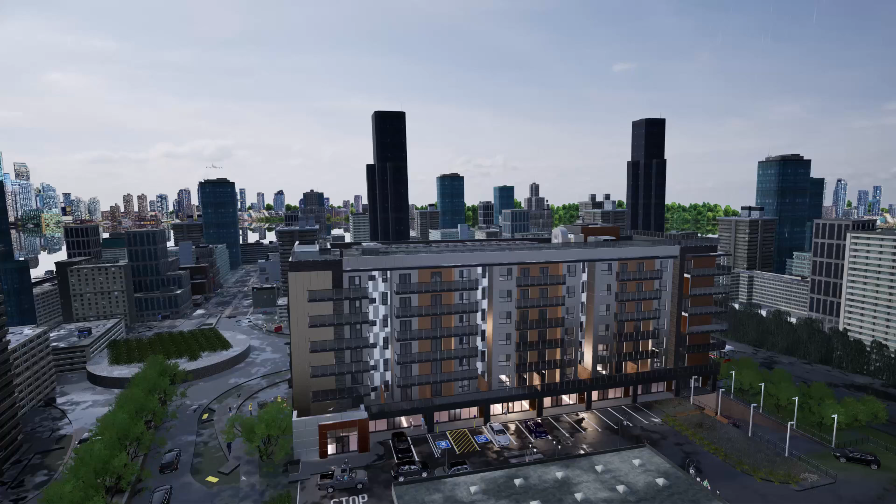Our proposed project is Ecolink, the mixed-use development. We are Triform Techno Design and our guiding motto is creating future-ready, eco-smart designs. Our team includes Birinder Singh Gariwal, Danish Madan, and Zishan Ahmed. Each of us brings unique strengths from visualization and design development to technical documentation and code research. Working together allowed us to combine these skills into a cohesive final project.

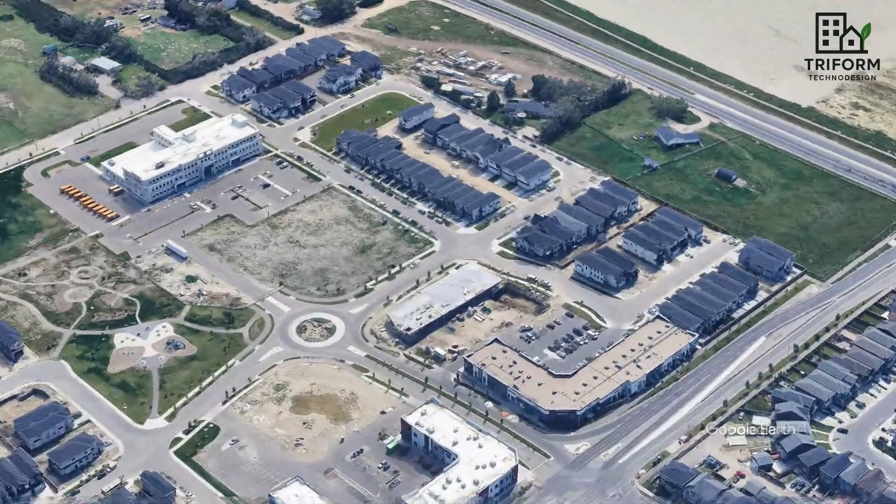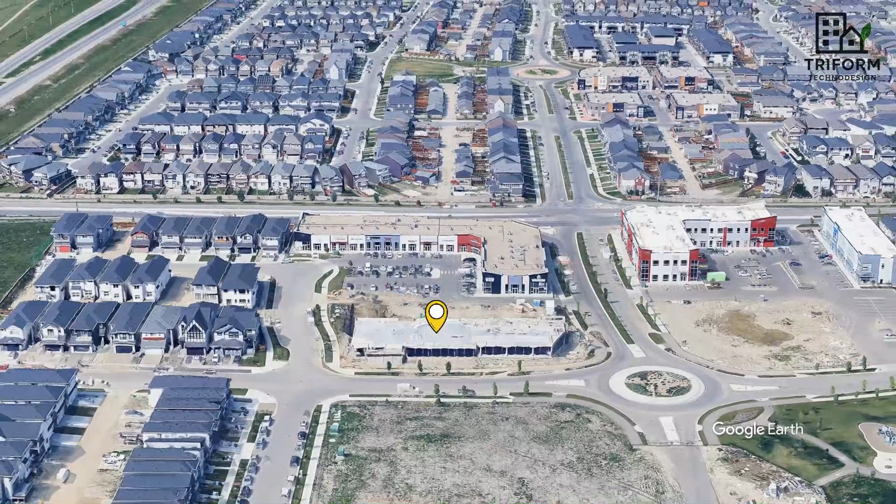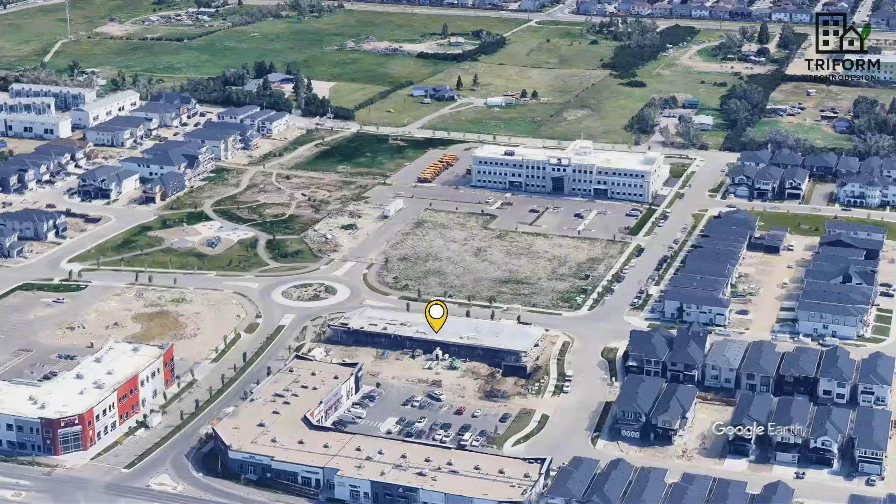The project is located near Metis Trail and 88th Avenue Northeast, at the junction of Guru Nanak Gate and 87th Avenue Northeast, in the growing community of Saddle Ridge in Calgary. This community offers strong potential for mixed-use development as we don't have a lot of opportunities in this community for commercial activities, making it an ideal site for our proposal.

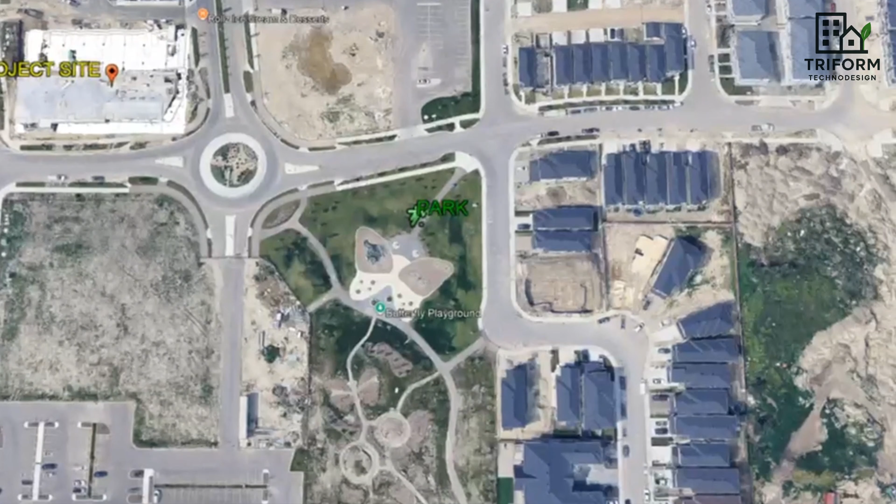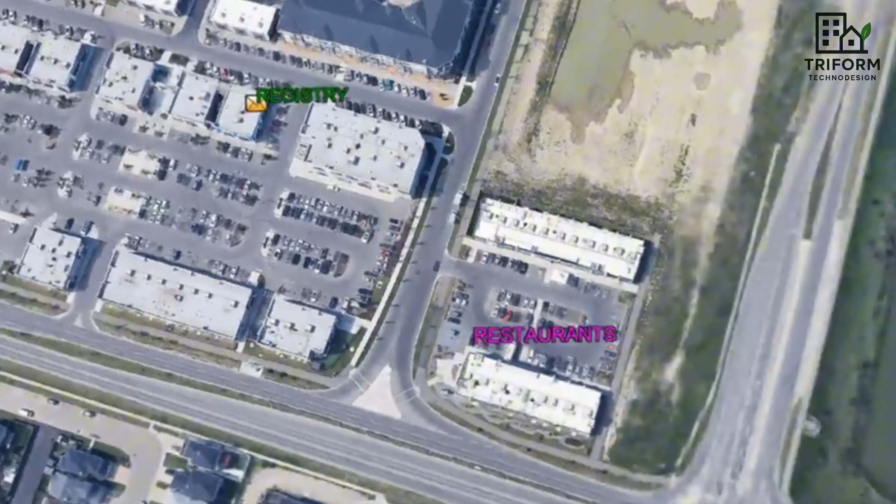Our proposed project has a lot of amenities like a park, and 100 meters away we have bus stops, and we have elementary schools at walking distance, and we have registry, restaurants and a train station within a 1.5 kilometer boundary.

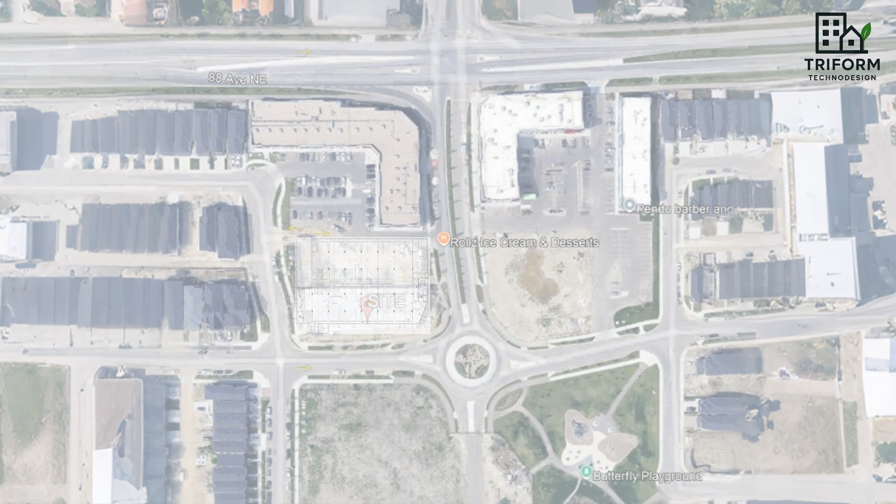Visuals showing the comprehensive external traffic circulation plan that ensures smooth and efficient flow of traffic around the site with well-defined entry and exit points for vehicles. Our design reduces vehicular delays, minimizes congestion, improves accessibility, and enhances pedestrian safety.

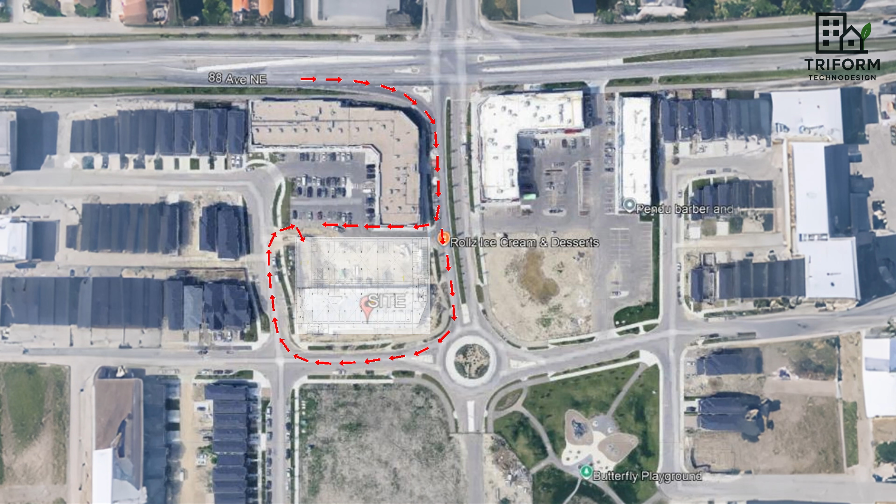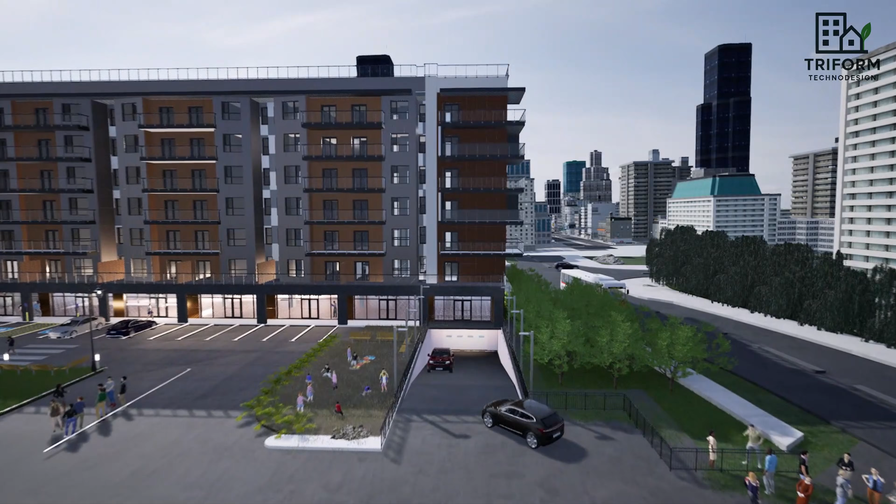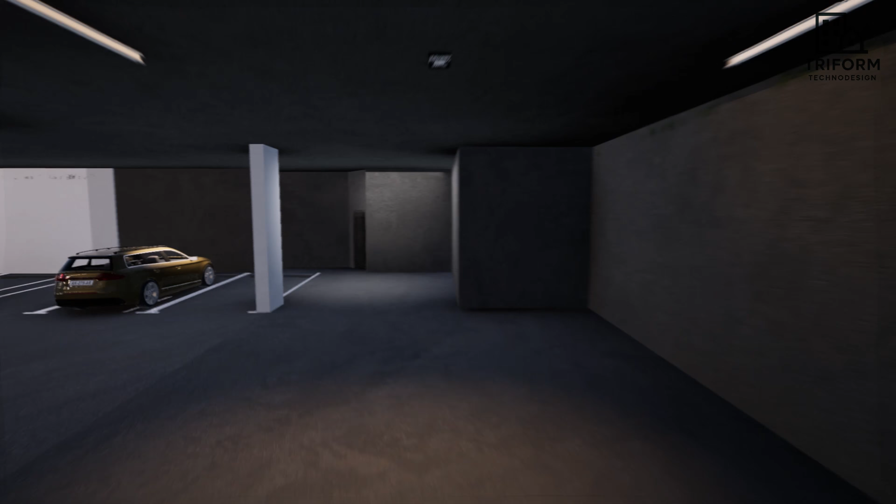Our underground parkade has been designed with safety, clarity, efficiency, and better vehicular flow of traffic in the basement in mind. The circulation layout ensures smooth two-way traffic flow with optimized aisle widths, easy maneuvering, and clearly defined entry and exit routes that provide safe access, while well-organized parking stalls maximize efficiency.

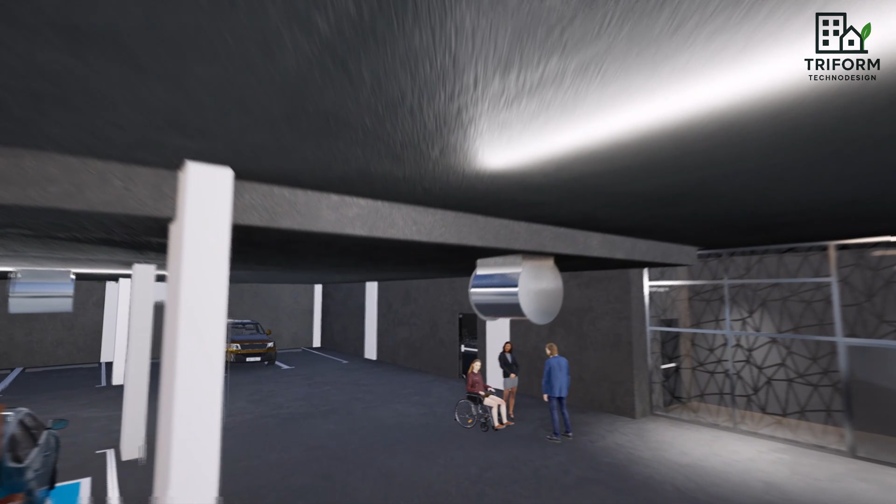Accessibility has also been prioritized with direct connections to the vestibules, elevators, and stairways, ensuring a seamless experience for both residents and visitors. These arrows highlight the vehicular movement across the site.

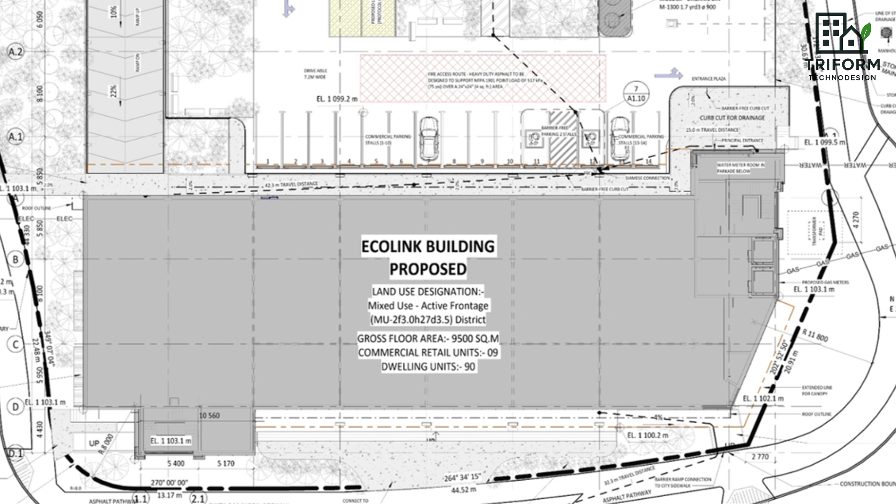The main building structure is supported with essential services including Molok bins for garbage collection, 2 dedicated loading stalls for deliveries, and a 2-way ramp giving safe access to the underground parkade. In the basement, stair cores are strategically placed to meet code, while aisle width exceeds 7.2 meters for safe circulation. Mechanical shafts ensure proper ventilation and prevent hazardous gas buildup, and the elevator core provides full barrier-free access across all levels.

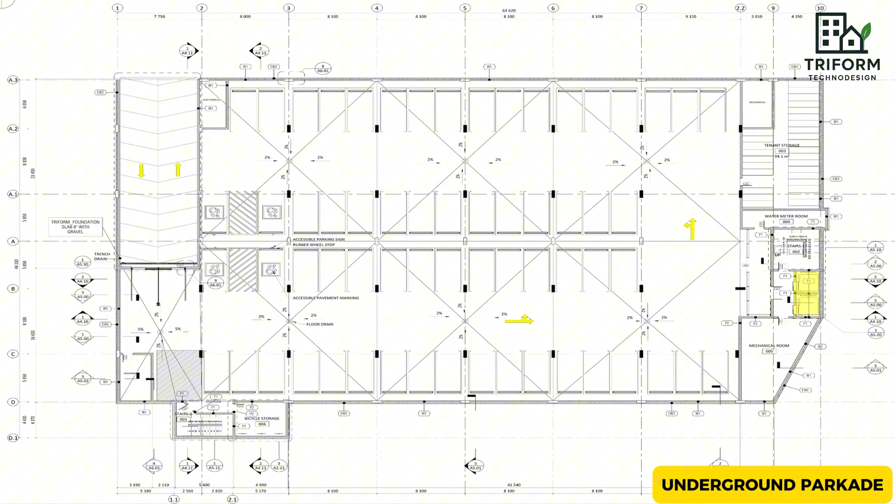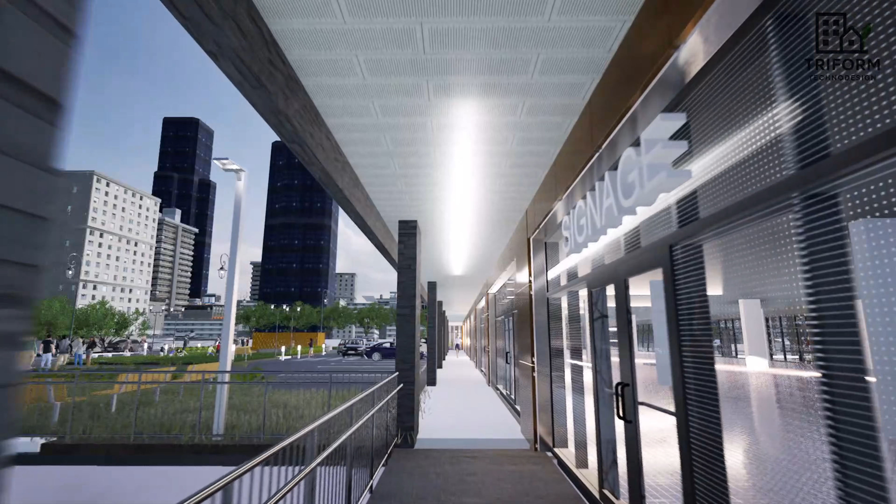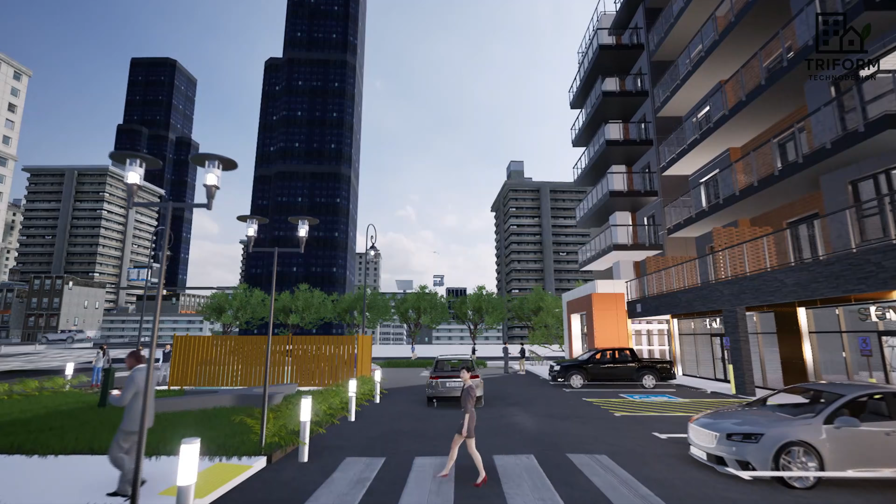On the commercial floor, we have 9 flexible retail units. You can see the entrance through the vestibule and through the lobby. We have an electrical room that delivers essential building services. In these visuals, you can see the walkway in front of the retail units, and you can visualize green spaces to enhance sustainability, and can see the covered Molok bin area, barrier-free stalls, and active retail frontage.

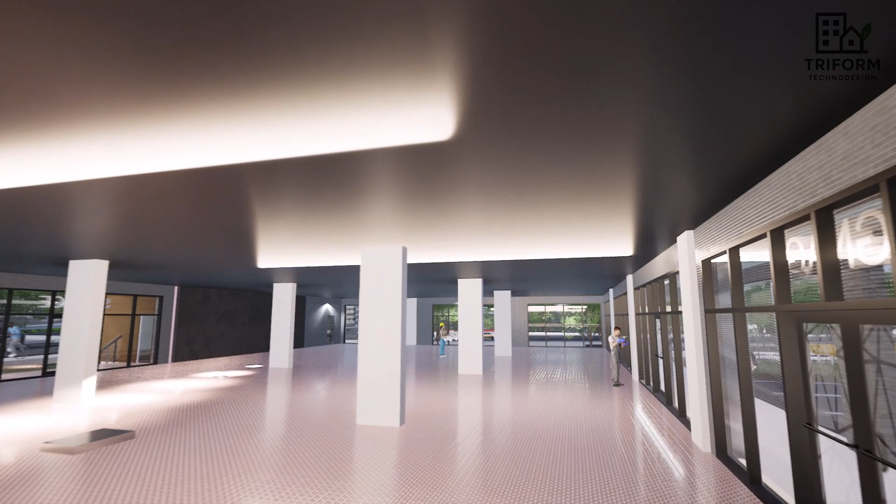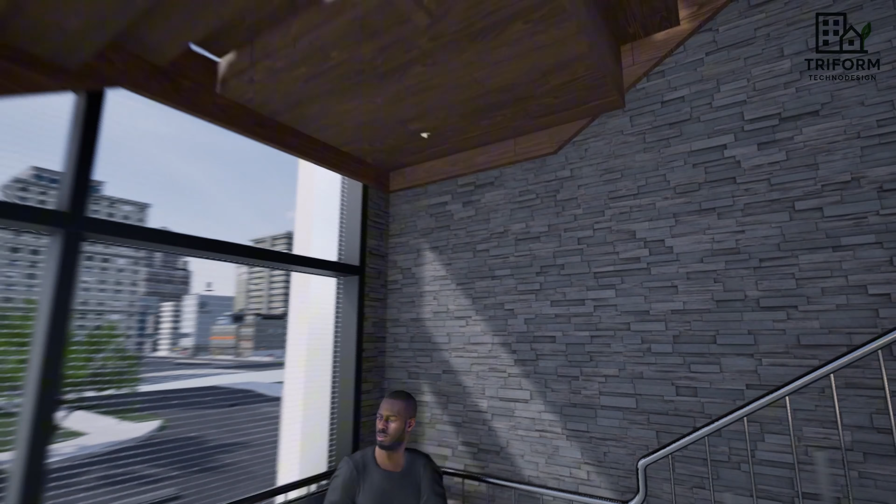These spaces are partially divided with open spans, allowing future reconfiguration to suit a variety of tenants, and exposed structural columns emphasize the adaptability of the retail layout. Finally, the reinforced concrete stair cores extend upward to support the structure, passing through residential floors and continuing through to the mechanical level. At the roof, we have integrated solar panels aligning the project with sustainable design goals.

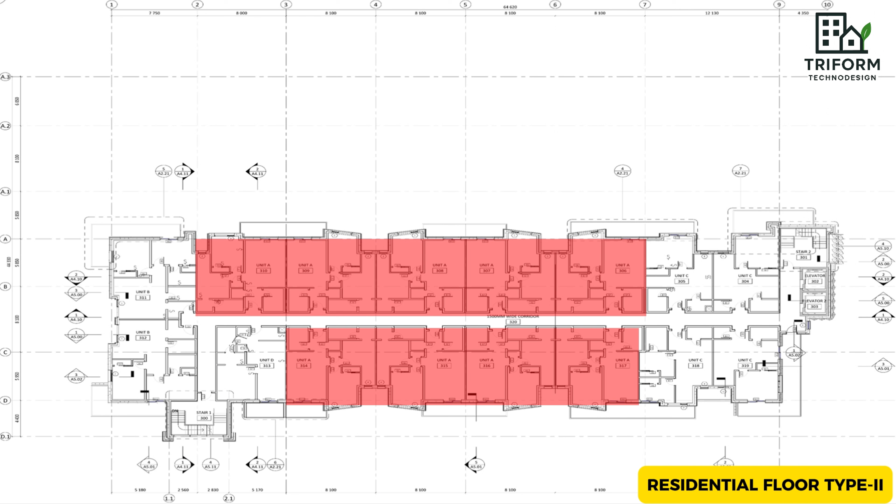Next is the Type 2 residential floor, which again includes Type A units with an enlarged plan shown here. Then we have the Type B units with the enlarged plans, the Type C units with its enlarged plan showing the internal layout, and then we have Type D units where you can also see the interior layout. The corridor here will also maintain a minimum 1500 mm width.

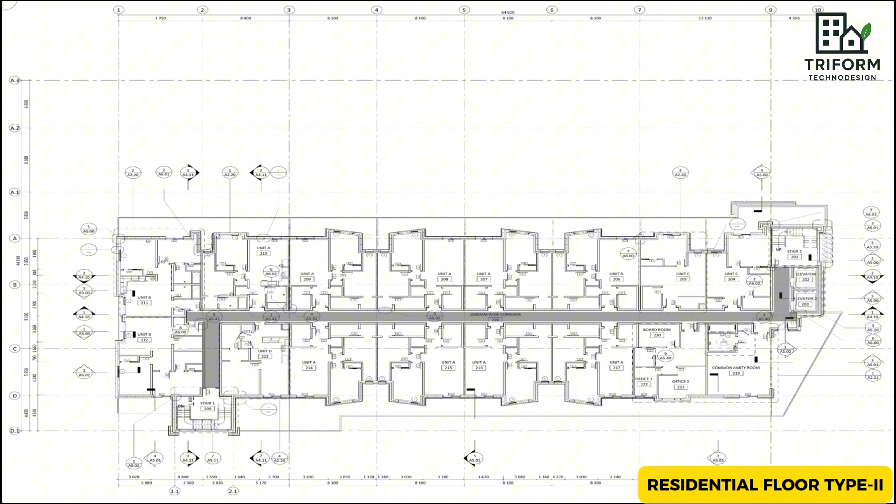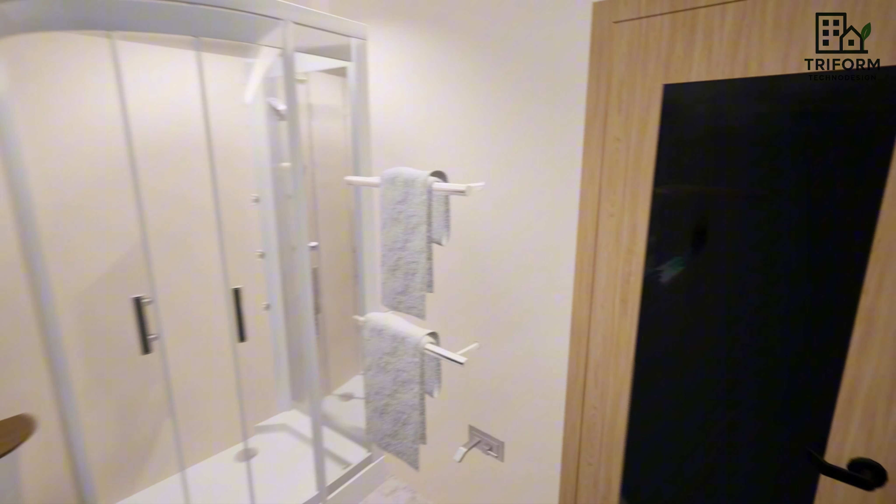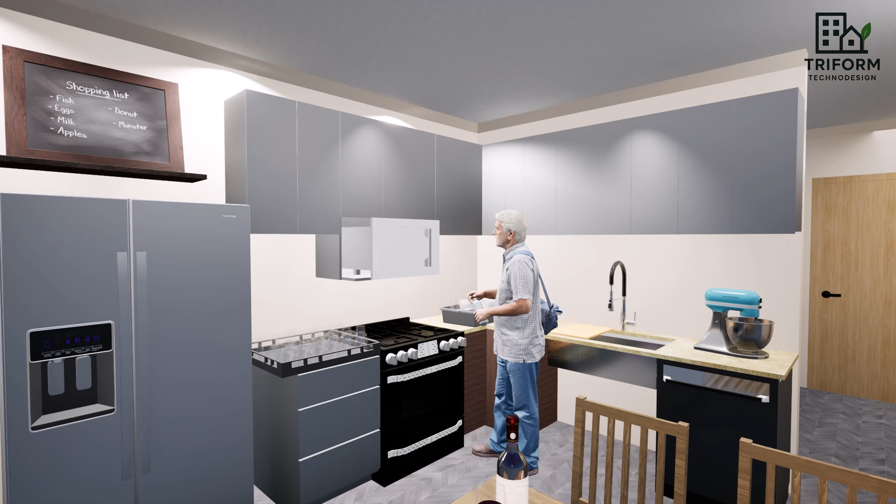These visuals highlight the interior of the apartment, including the washroom with its aesthetic finishes. This is the shared washroom that can be accessed by visitors as well. Actually, this is a Type A unit, which is a double room layout, and you can see the modern and aesthetic interior of the kitchen, living space, and the dining area.

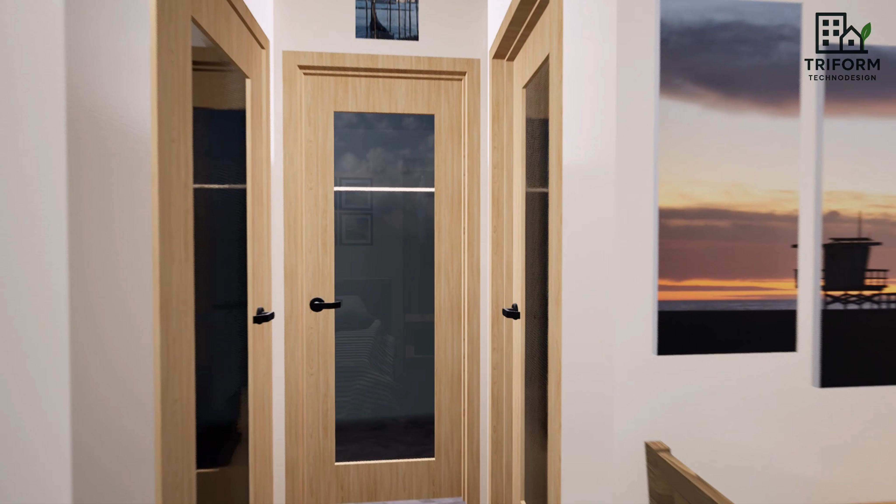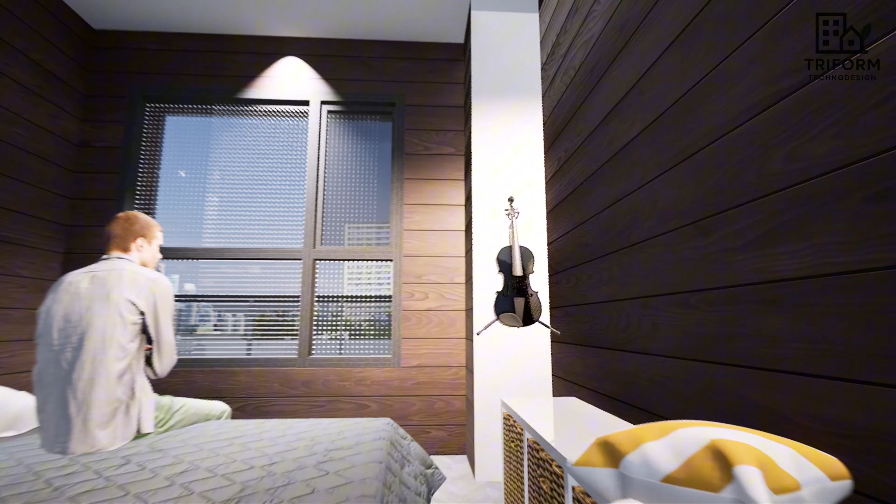The entrance seen in the video is connected to the corridor. And inside we have the first bedroom having storage space in it and having its own attached washroom. Another bedroom has its own connection with the balcony, and windows are provided in each room to ensure natural light and ventilation.

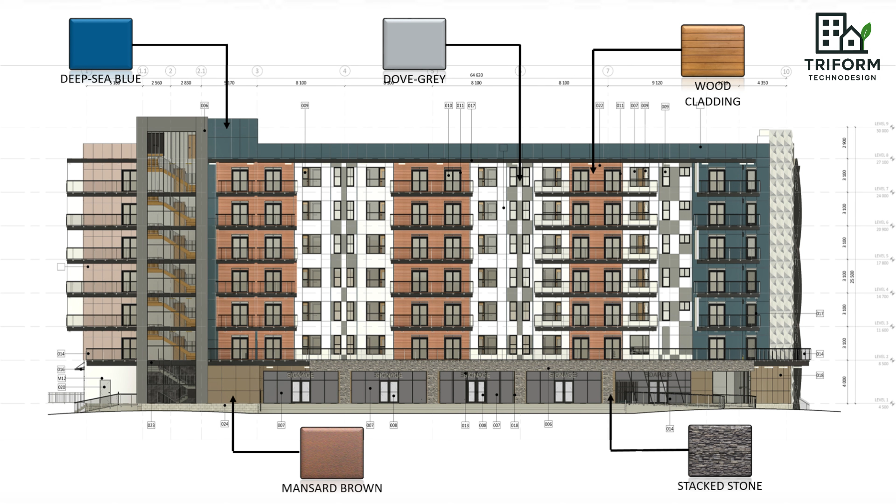Here we see the front elevation featuring deep sea blue and dove grey metal panels with warm wood cladding on the balconies. Stacked stone accents frame the curtain wall, while mansard brown panels are used to add contrast, and a continuous curtain wall rises from the main floor to the mechanical level.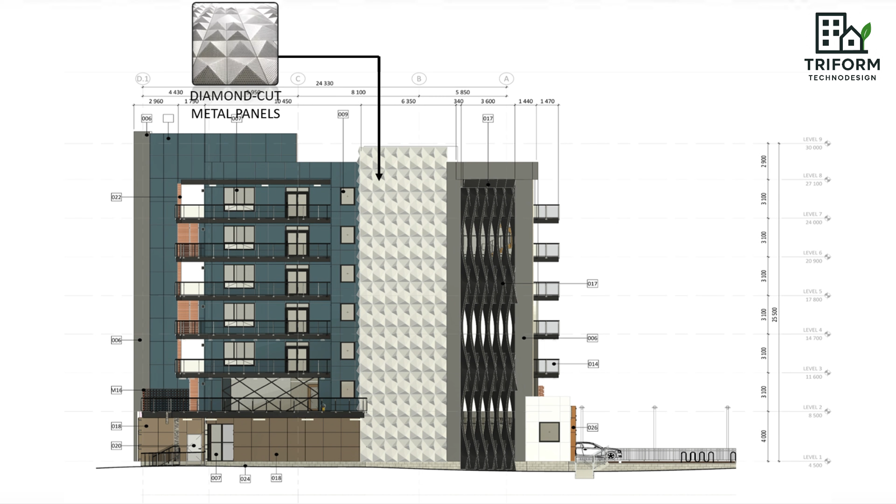On the rear elevation, sea blue metal panels are applied, while sliding doors provide direct access to the balcony. Regal white composite panels, stacked stone, and metallic copper accents are placed around the vestibules and building entrances, enhancing the overall aesthetic appeal. Moving to the left elevation, we see diamond cut metal panels, glass railing across the balconies, and a combination of regal white panels and stacked stone.

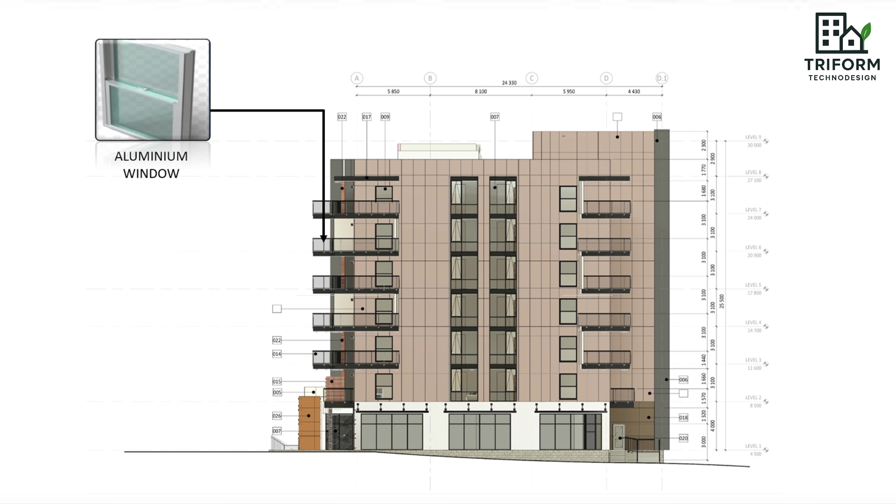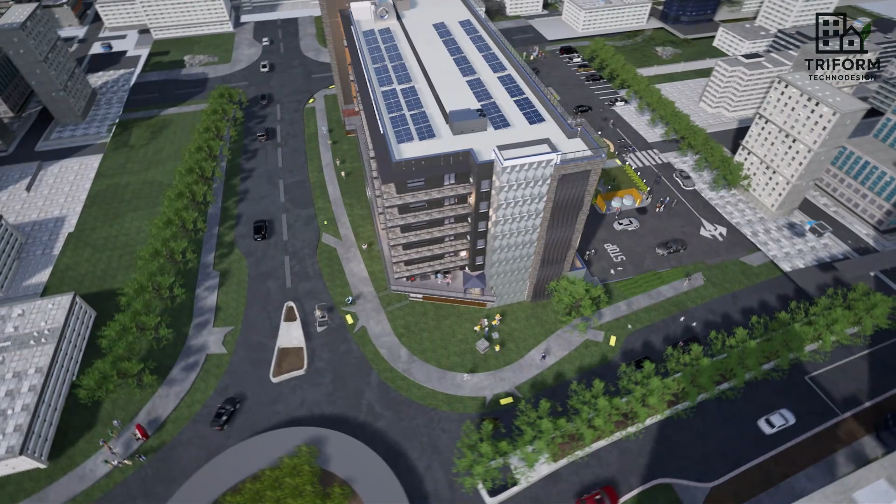Another elevation highlights aluminium windows, brushed copper panels, and sunshades for the curtain walls. Finally, the overall 3D view presents the building in its entirety, showcasing all materials and illustrating how it will appear in the real world once construction is complete. The video concludes with a 3D visualization of the exterior cladding, bringing the design to life.

We will be discussing details in this section. This shows the extended part of the main floor designed with a slope directing water towards the trench drain and into the main storm drain system.

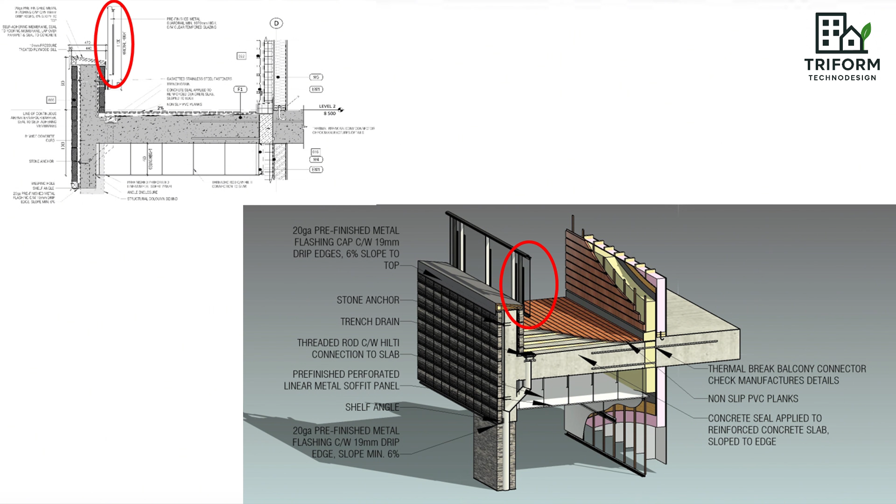A thermal break balcony connector is used to minimize thermal bridging, while insulation is continuous and an air barrier is maintained on the exterior ceiling to improve energy efficiency, and glass railing is installed to ensure safety for pedestrian use, and a parapet cap has been provided to protect the structure from water infiltration and complete the aesthetic finish.

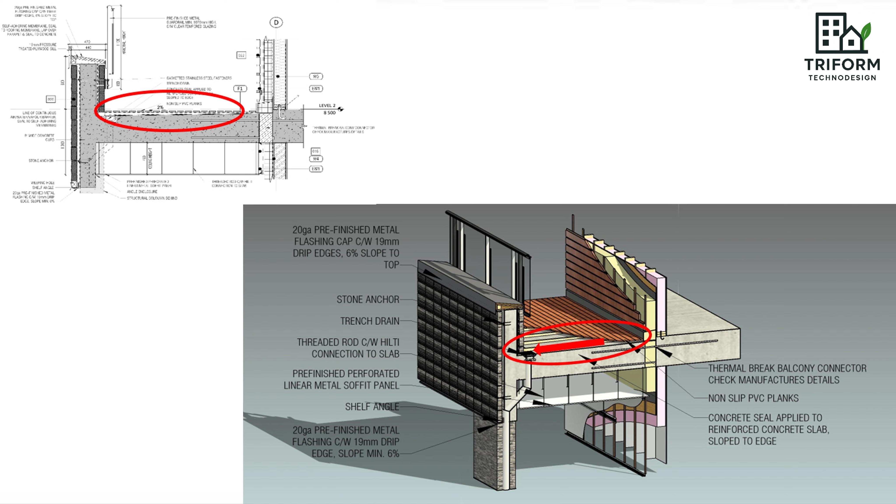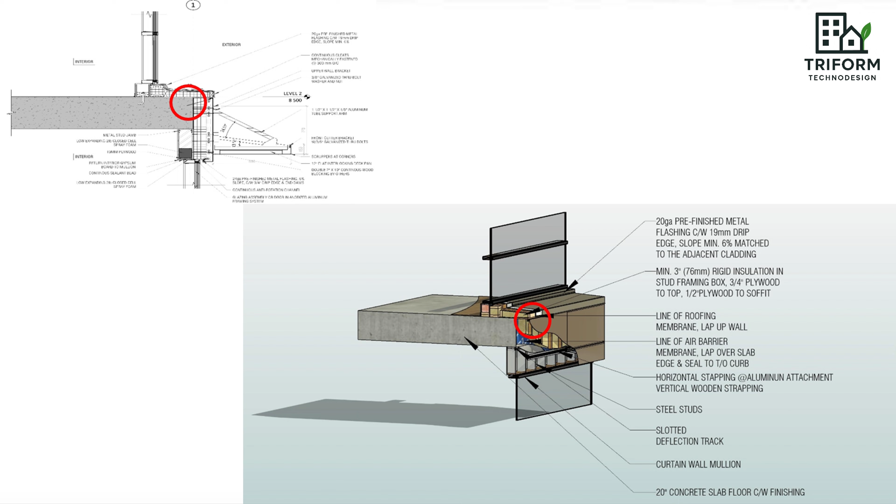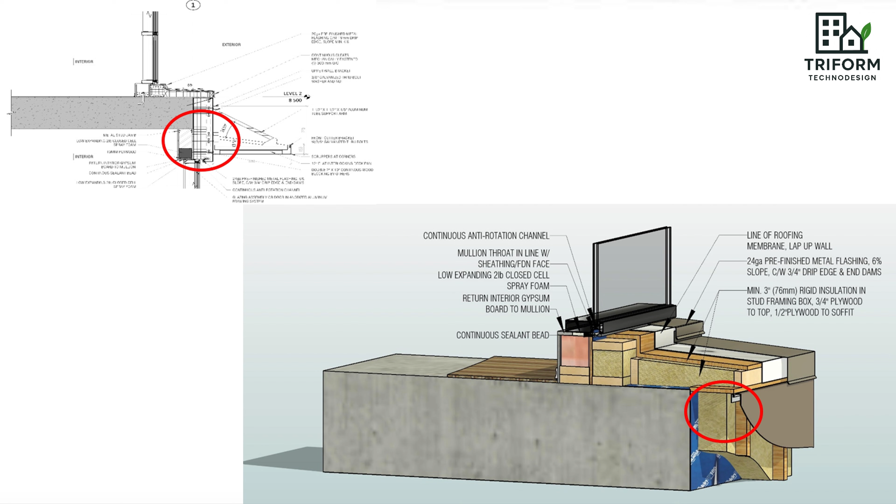This detail shows the curtain wall anchored to a slotted deflection track at a 20-inch concrete floor slab with steel-stud, wood and aluminum strapping supporting the panels. A continuous air barrier and rigid insulation ensure air tightness and thermal continuity, while sloped metal flashing and the roofing membrane direct water away, protecting the structure and creating a durable, energy-efficient facade.

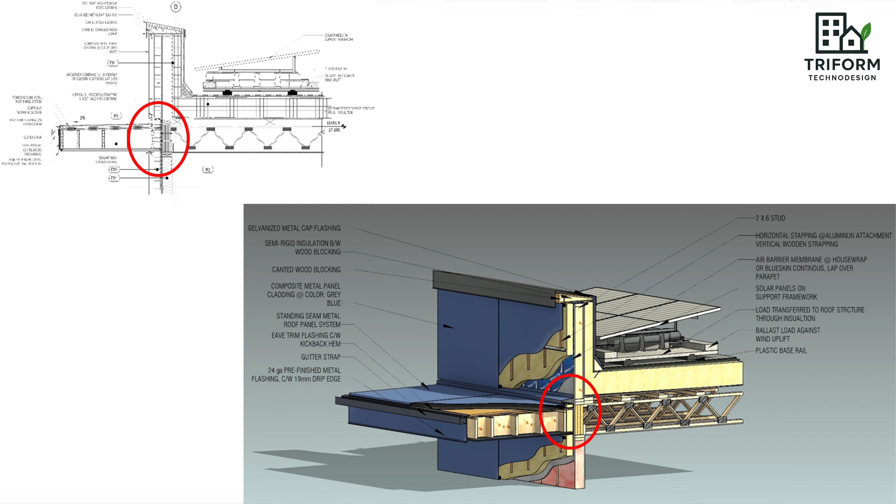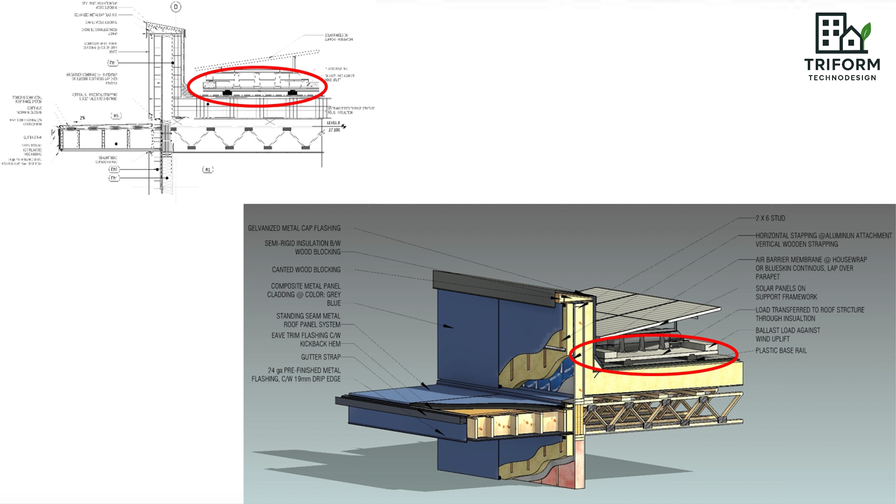In this detail, continuous insulation is maintained with semi-rigid insulation and an air barrier lapping over the parapet. Vertical wood and horizontal aluminum strapping supports the cladding, and the non-structural extended roof is bolted back with insulation filling the junction. Sleepers create slope for drainage, and solar panels sit on a ballasted, non-penetrating system that resists wind uplift without puncturing the waterproofing. This is the structural system for the same roof, showing the shims used to slope the roof.

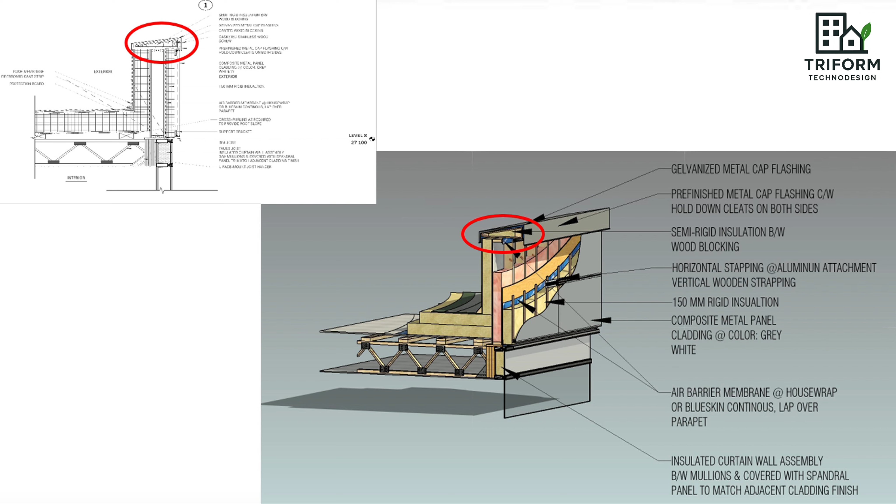In this detail, the wooden roof connects with the curtain wall to ensure structural integration and envelope continuity. A parapet cap protects against water and weather, while roof truss joists tie into LVL lumber with U-shaped hangers for strength. The air barrier runs continuously over the parapet to prevent thermal breaks, and the sloped cap directs water away, protecting the critical joints.

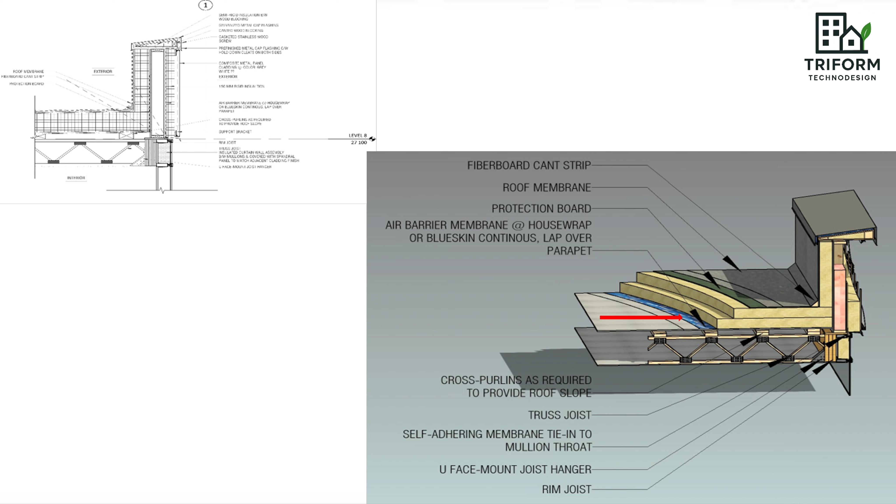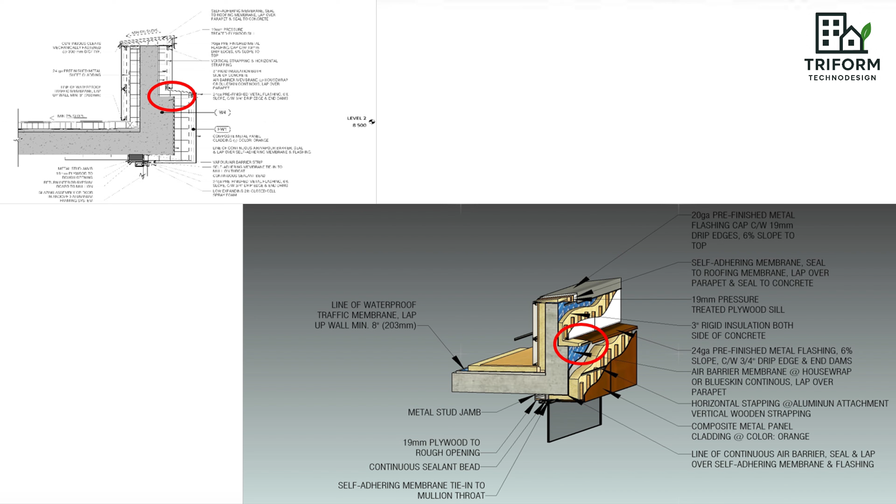In this detail, the curtain wall connects to the underside of the extended concrete floor podium with sealant and membrane tie-ins to block air and water leakage. The parapet is capped with metal flashing with drip edges to shed water, while rigid insulation wraps both sides of the concrete for thermal continuity. The roof truss joists tie into LVL lumber using U-shaped face mount hangers for structural strength.

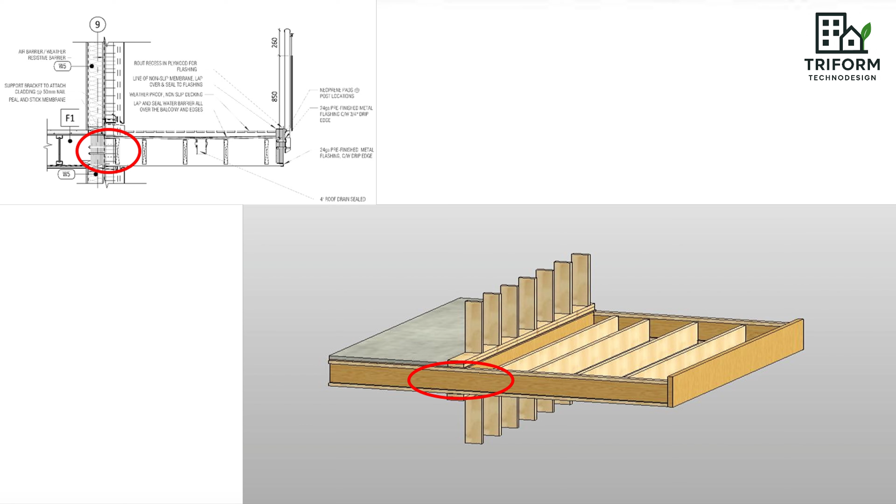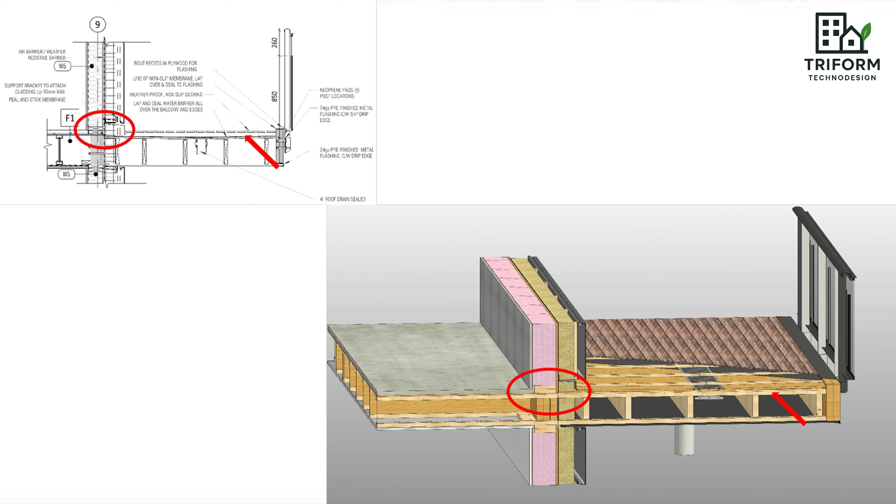In this floor-to-floor connection, the I-joists are extended outwards to improve structural stability. To address drainage at the balcony, a sloped sheathing layer is added above this extension, creating a trench drain system that directs water away from the wall.

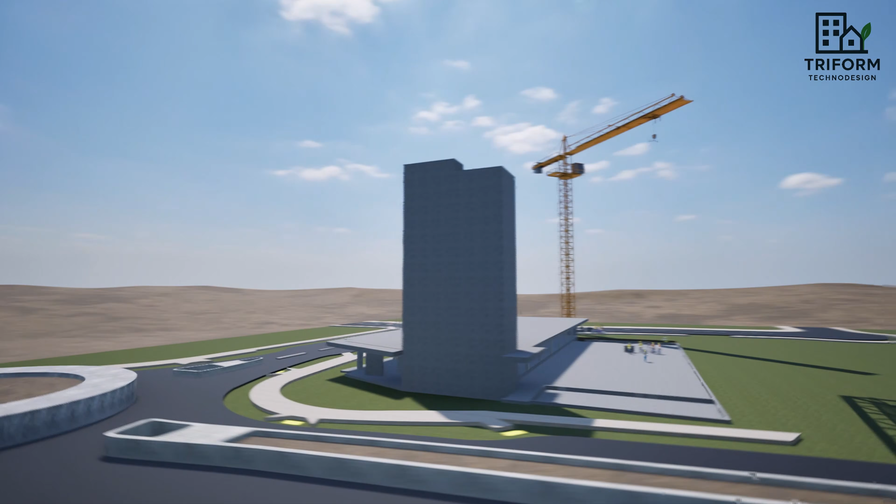The process begins with excavation and pouring concrete for the underground level, main floor and shaft to form a strong foundation. Above the concrete base, the wooden structure rises with 2x6 lumber and metal studs, leaving proper openings for doors and windows. Joists, wall studs and roof framing are added, reinforced with plywood sheathing. Finally, the construction is completed and the building now stands in its full form.

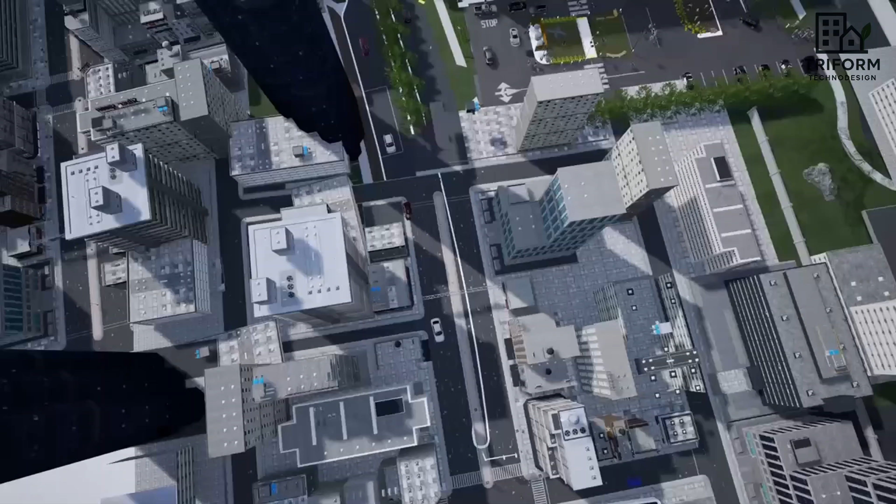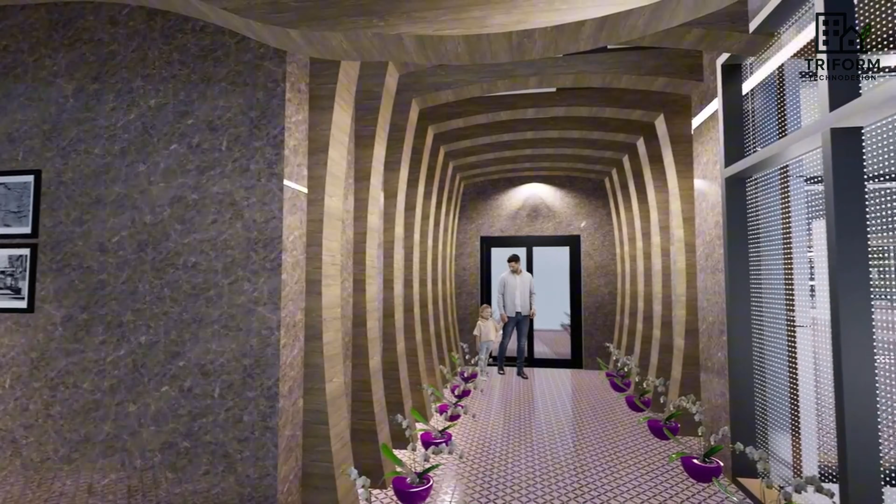These visuals show the whole Ecolink project, a sustainable 7-story mixed-use development that combines residential living with retail opportunities. As you enter, the main lobby sets the tone with its open modern design that connects directly to the elevators for accessibility and smooth circulation.

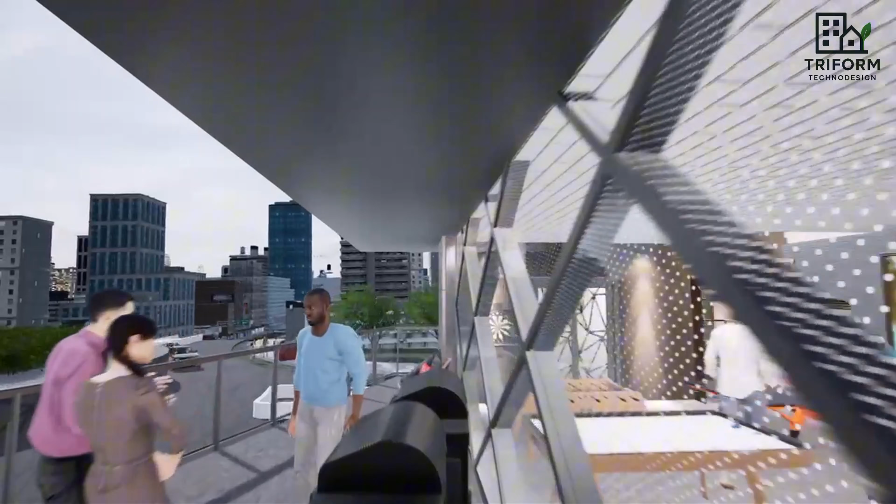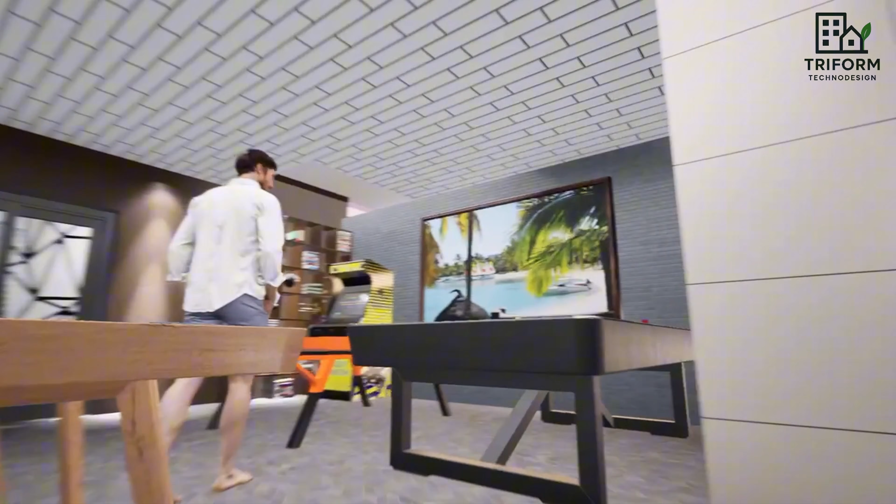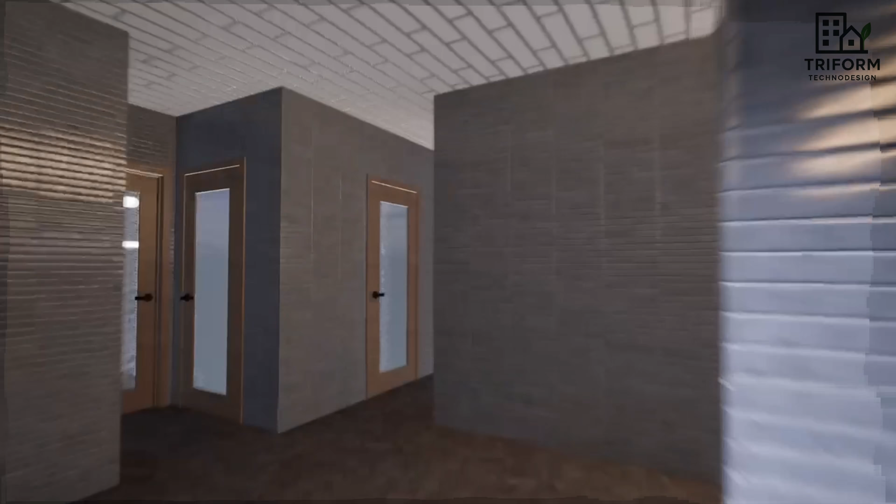The amenity space provides a warm, community-focused environment where residents can relax, socialize, or work, fostering connection and a sense of belonging. Altogether, Ecolink is not just a building but a thoughtfully designed, future-ready community that prioritizes sustainability, functionality, and connected living.

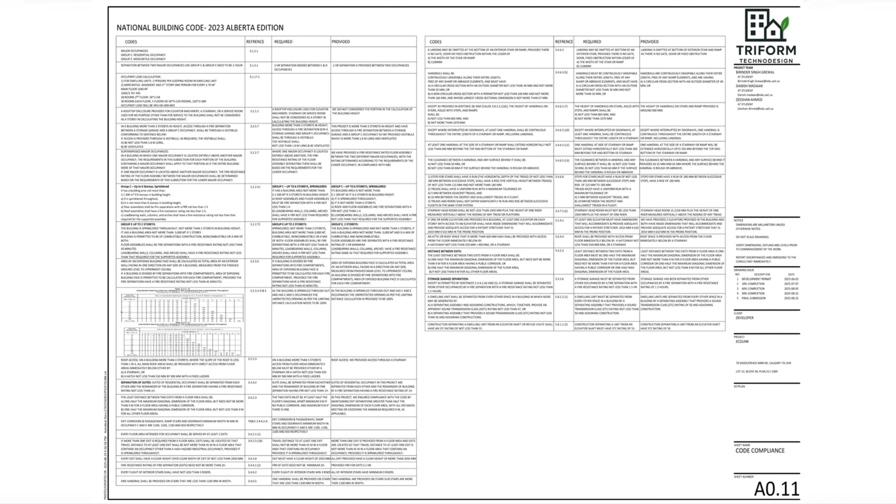In this final segment, we are presenting the complete set of project drawings compiling all the work we have developed throughout the semester. These sheets bring together everything we have covered, from code compliance and bylaw information to site analysis, floor plans, sections, elevations, and construction details.

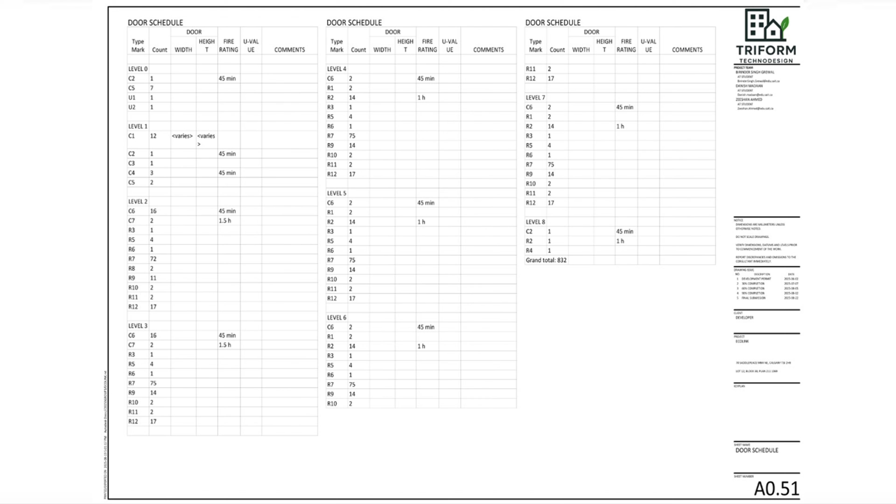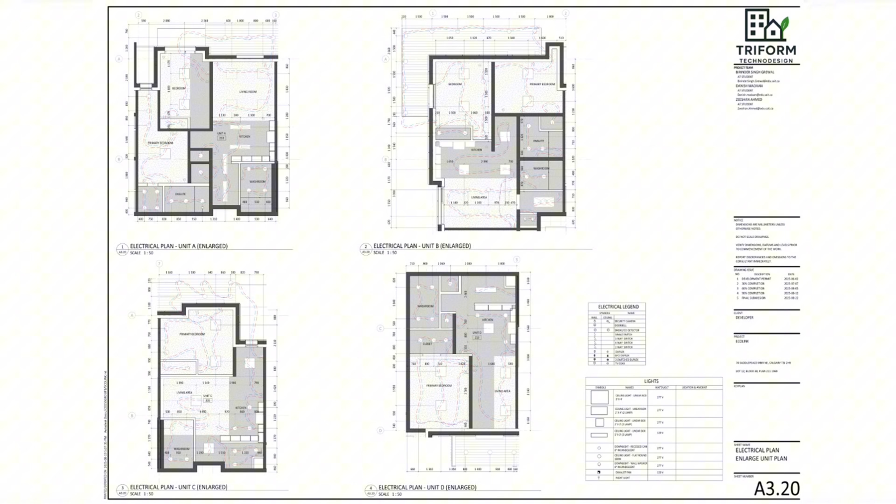As we scroll through, you can see how each page builds on the last, tracing the full design journey of the Ecolink development. The set begins with planning and regulatory frameworks, followed by site layout and building plans, and then moves into structural and envelope details that demonstrate both code and energy compliance.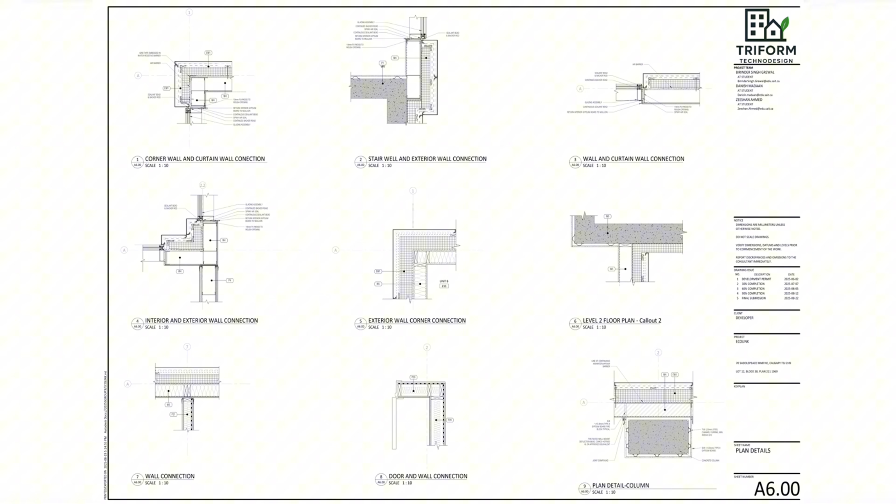This drawing package represents not just the final product but the process: analyzing, designing, coordinating, and refining each step. With this, our vision for Ecolink is fully documented as a professional submission showcasing a sustainable, functional, and community-focused development. And with that, we conclude our presentation.